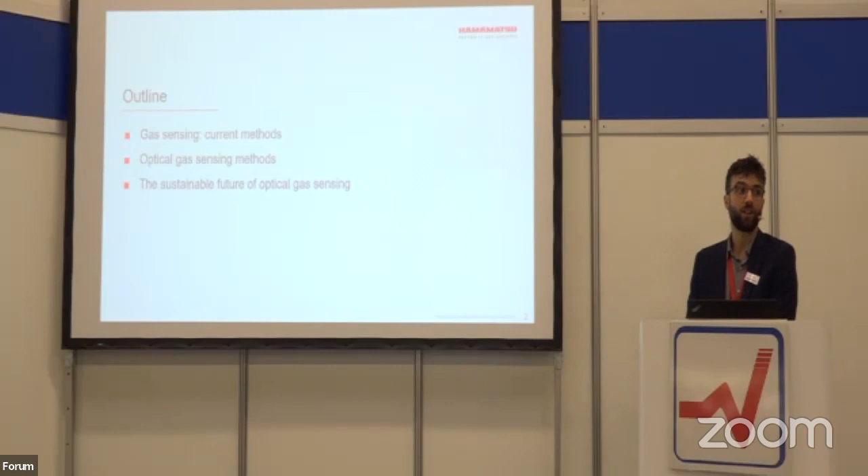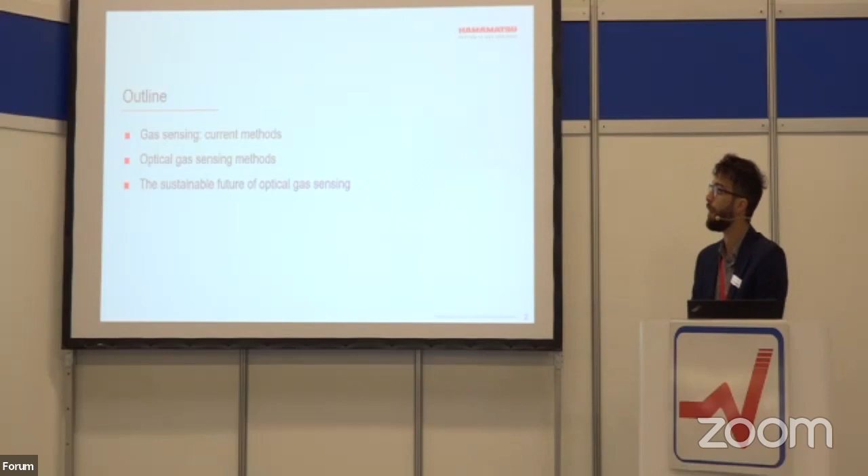First, I want to give you an outline of my talk today. At the beginning, I'm going to cover general topics about gas sensing, comparing several technologies, optical and non-optical. Following that, I'm going to talk about optical gas sensing and mention a few methods that can be used to detect gases. Then, in the end, I'm going to introduce Hamamatsu's sustainable technology in terms of mid-infrared detectors for the future of optical gas sensing.

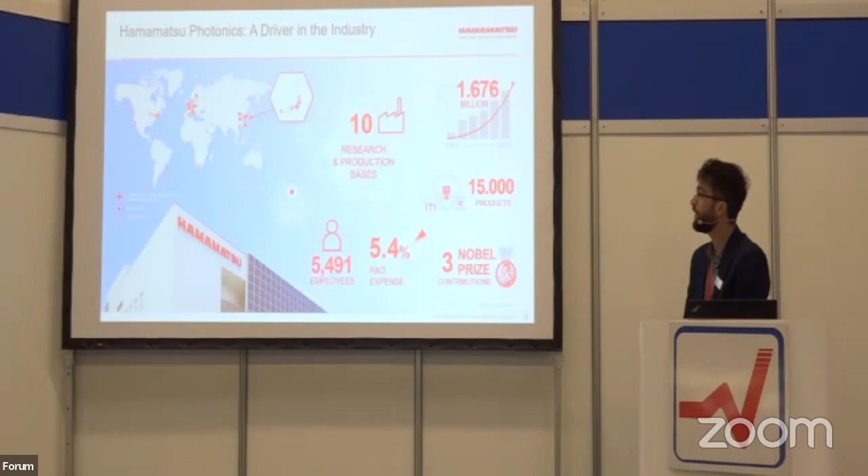A brief introduction about my company: Hamamatsu was founded in 1953 in Japan. We have several subsidiaries in Europe, the closest one being in Herrsching, close to Munich. The company commercializes and manufactures over 15,000 different products, including photonic components like the detectors I'm talking about today, but also light emitters, LEDs, lasers, up to complete systems used for biological research or semiconductor manufacturing.

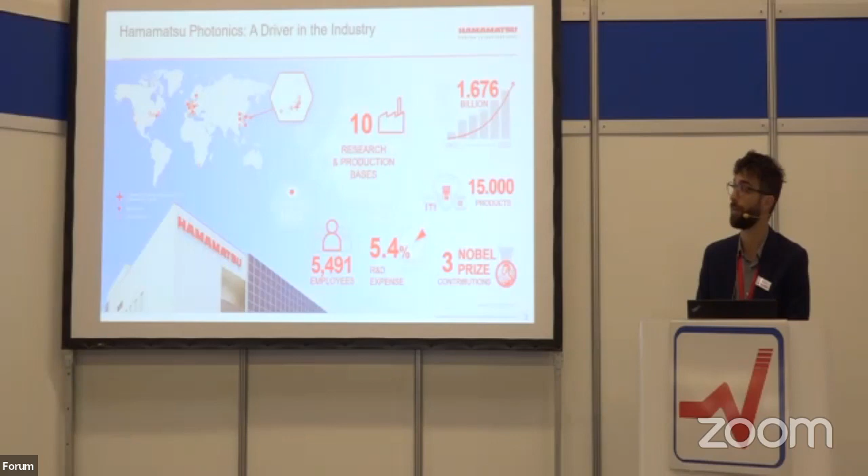Diving into today's topic, why do we need gas sensing? I identified three main reasons. The first is safety. Some gases may be explosive, like methane or hydrogen. Some can be toxic, like CO2 or hydrogen sulfide, and some, like oxygen, can be both toxic and explosive. We may want to measure them in certain environments like mines or oil rigs.

Another well-known reason to measure gas is environmental. For this, we need to measure important greenhouse gases like methane and CO2, but other gases as well, like NO2, SO2, or volatile organic compounds.

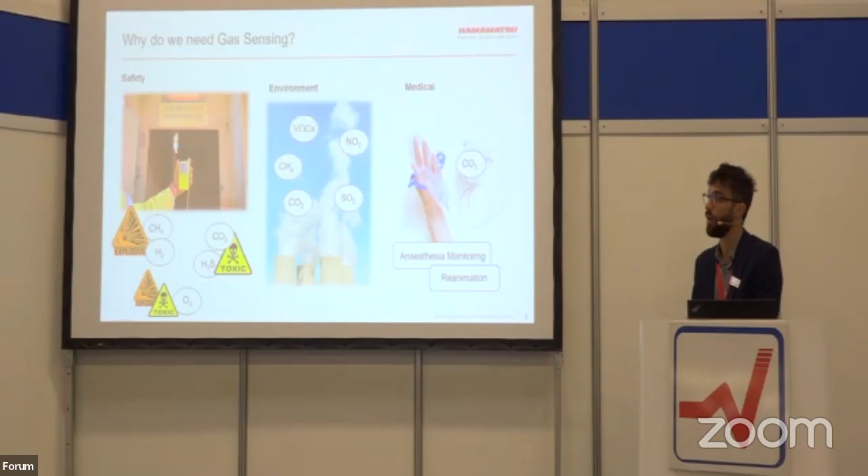This is an emerging field, the medical field, in which we measure CO2 through breath. This is done for monitoring of anesthesia or monitoring of reanimation.

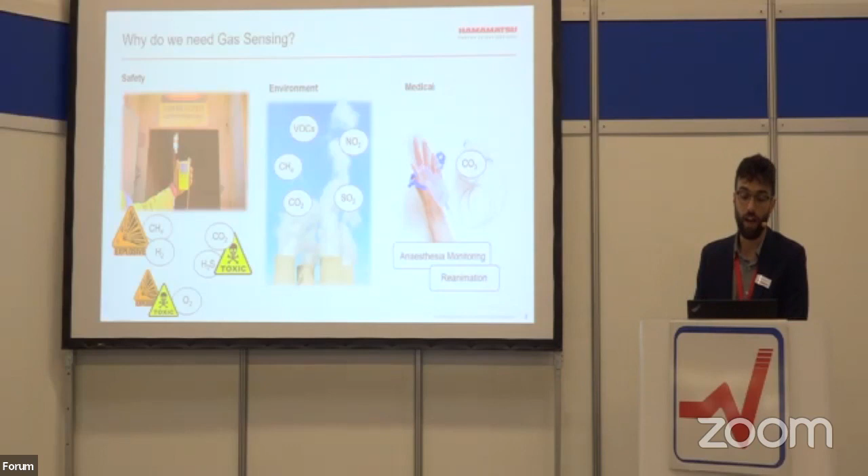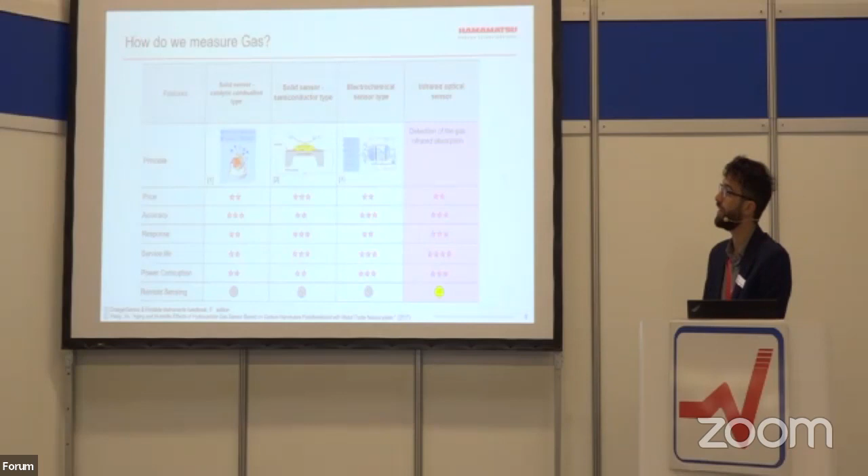I decided to put this table here to compare a few different technologies we can use to detect gases. Obviously, the choice of a specific technology really depends on the gas you want to detect, because not all technologies are suitable for all gases. But I thought this could be useful whenever you have the possibility to choose.

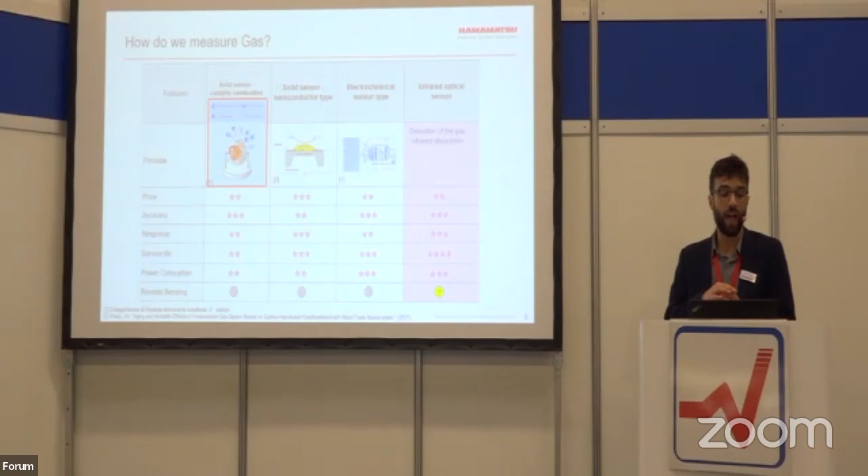The first technology, very well established, is catalytic combustion sensors, which have a resistor wrapped in a catalytic bed. This sensor detects combustion using a resistance measurement.

Similarly, we have a semiconductor type that works in a similar way. There is a heated membrane, and on top of it, we have a metal oxide deposition. What we measure here is the redox reaction that happens at the surface of the metal oxide.

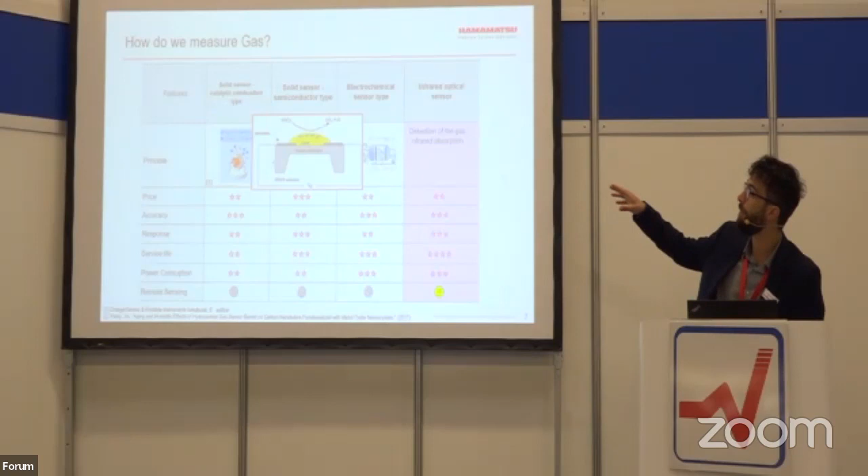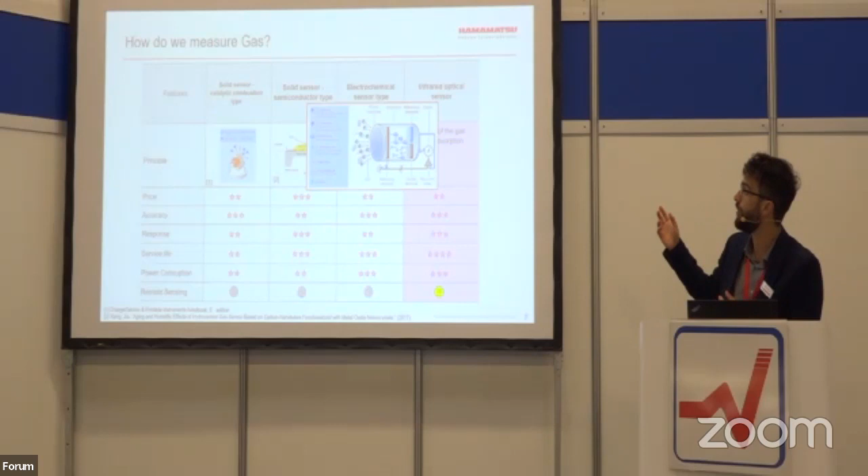A different category is electrochemical sensors. In this case, we have basically an electrochemical cell, so you have a cathode, an anode, and an electrolyte. With this method, you're able to measure polar molecules—the molecule has to be electrically charged, or needs to be ionized, in order to be detected.

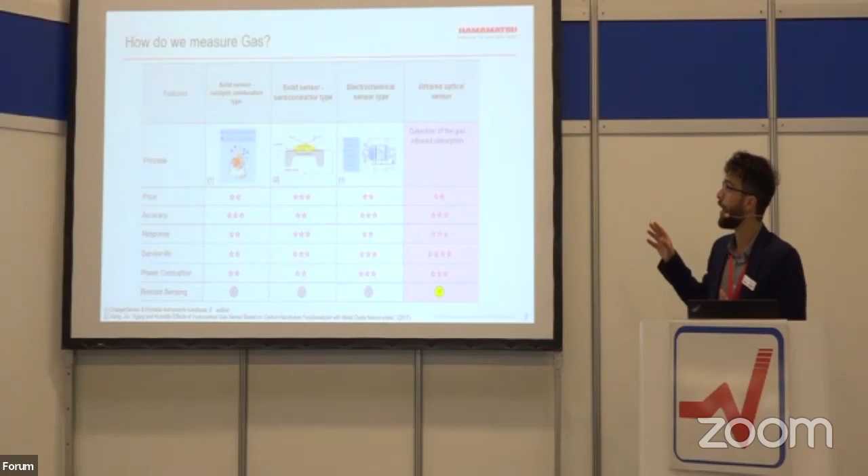My talk today is going to focus on optical detection, and I'm going to present a few methods later. But first, I want you to focus on the comparison here. Price-wise, optical sensing may be a little more expensive than the other technologies in the table, but it is more accurate and has a faster response.

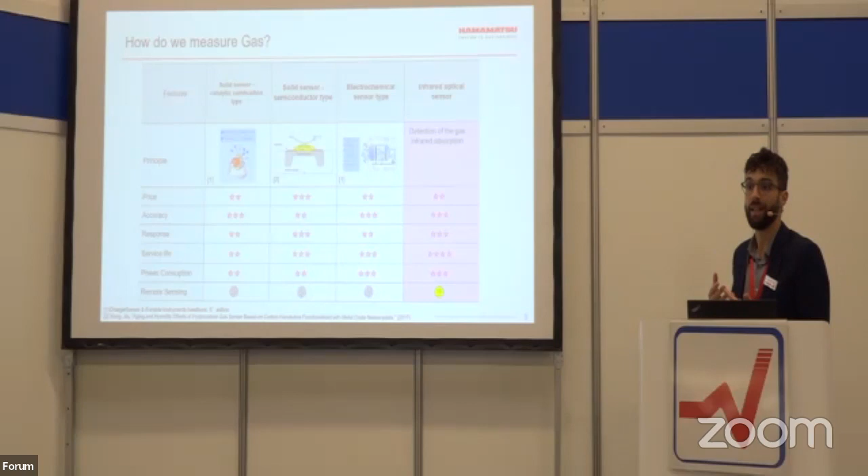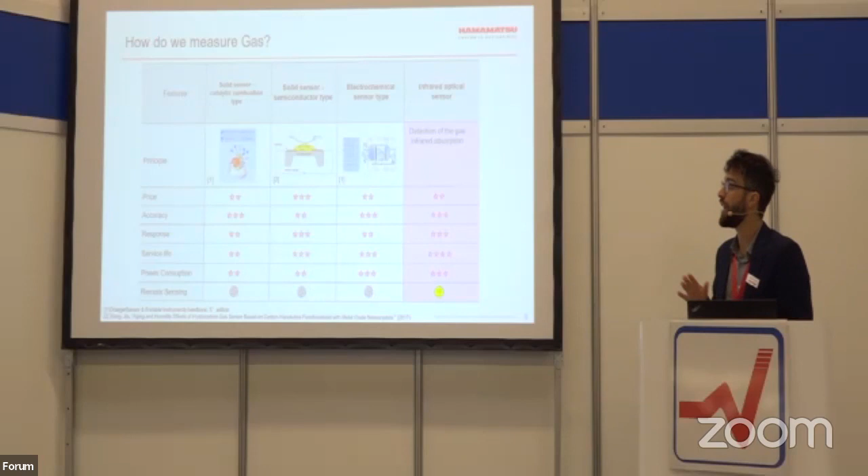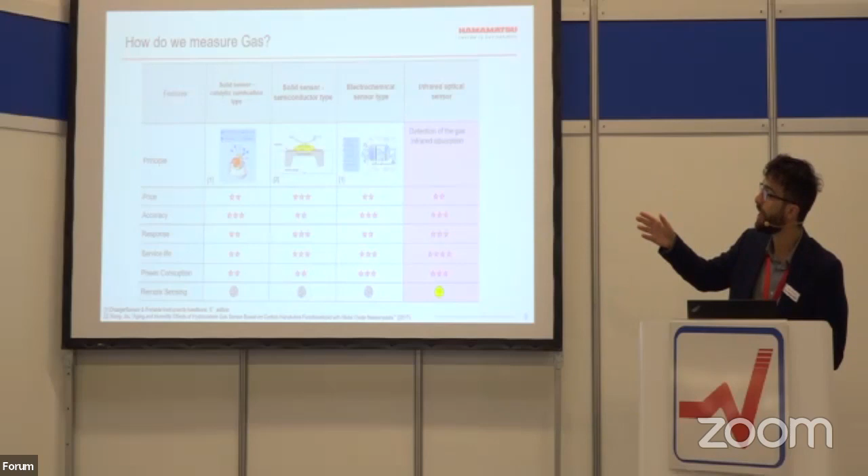Last but not least, we have remote sensing. All other, non-optical detectors need to be in direct contact with the gas to work, while infrared optical sensors do not come in contact with the gas.

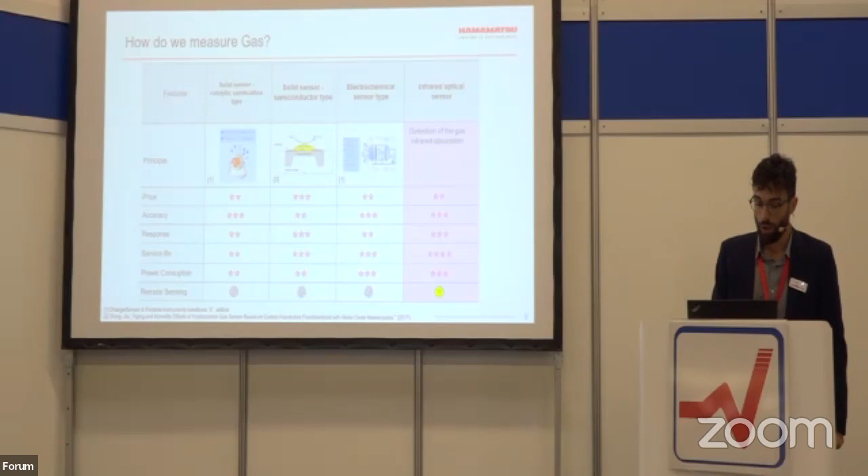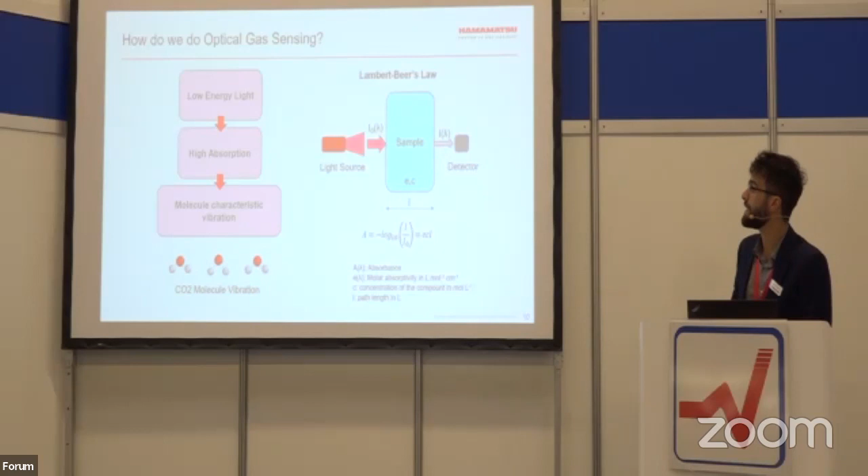The absorbance, which is also related to the sensitivity of our sensor, depends on three main factors: molar absorptivity, specific to the wavelength we're going to send; the concentration of the compound we want to measure, so we're also able to measure the concentration of the gas; and finally, important for what I'll say later, path length. The longer the path the light travels through the sample, the higher the absorbance, and the higher the sensitivity of our sensor.

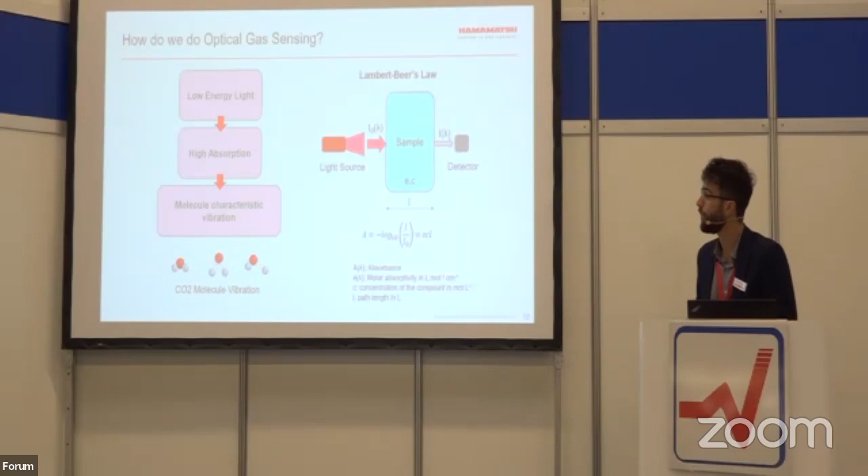Today I'm going to talk about mid-infrared wavelengths, but why do I focus on mid-infrared when the electromagnetic spectrum is so wide? There are three main reasons. One is we can achieve higher sensitivity in this wavelength range, mostly because the absorption peaks of many target gases are higher when we work with longer wavelengths.

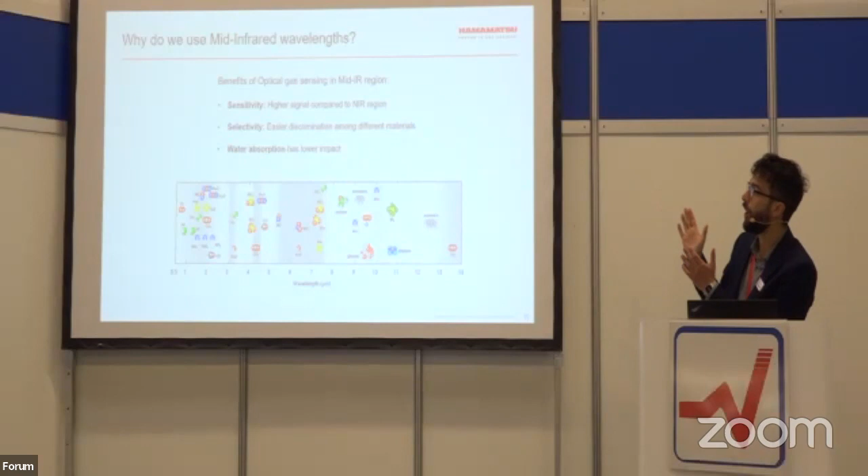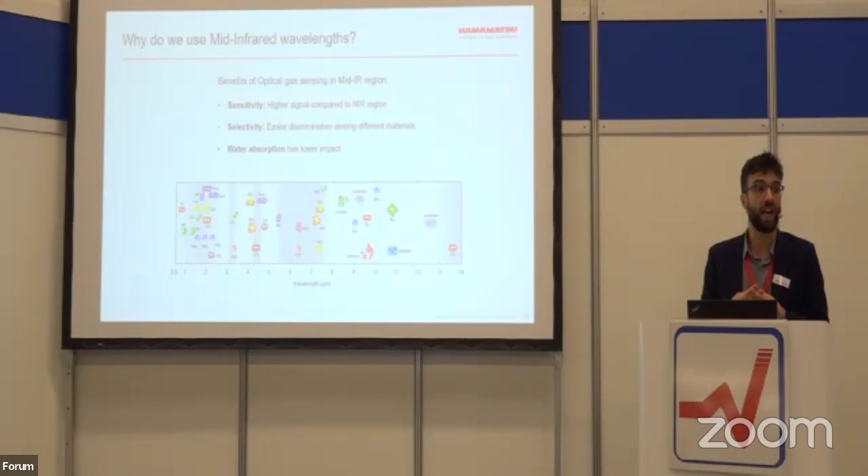Second, very important, selectivity. As you can see, going to the lower end of the electromagnetic spectrum, the gases are all crammed together, while when we move to longer wavelengths, the absorption peaks are more spaced apart. This means we have less cross-sensitivity towards gases when working in mid-infrared.

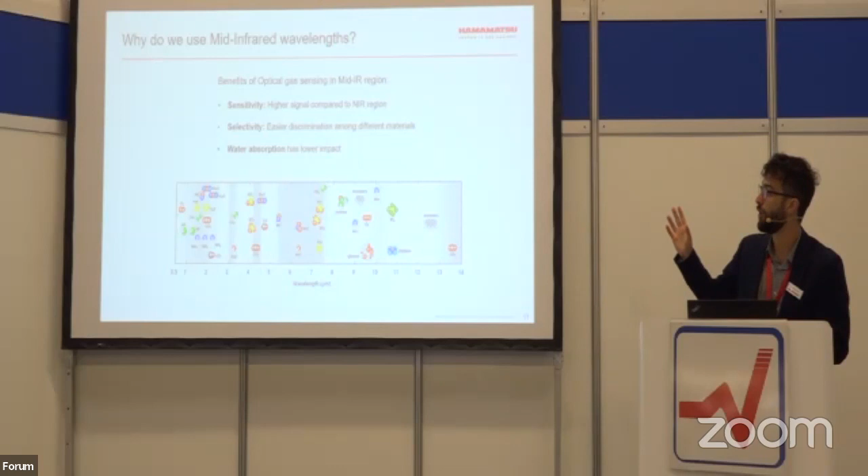And the third reason is lower impact from water absorption. We have several absorption peaks at shorter wavelengths, but moving to mid-infrared, water is absorbed less, and this makes our measurement independent from humidity in the air, for example.

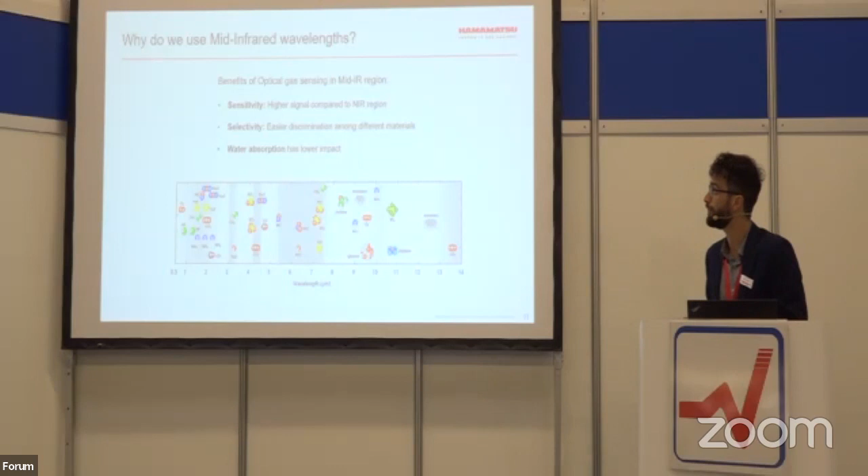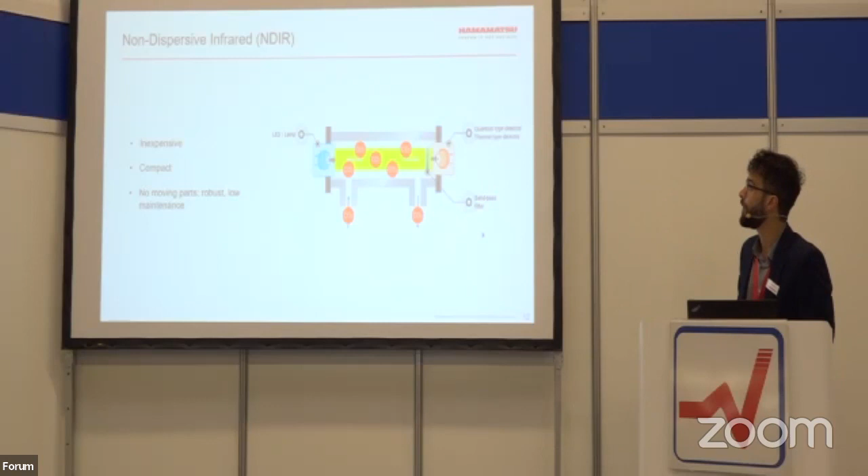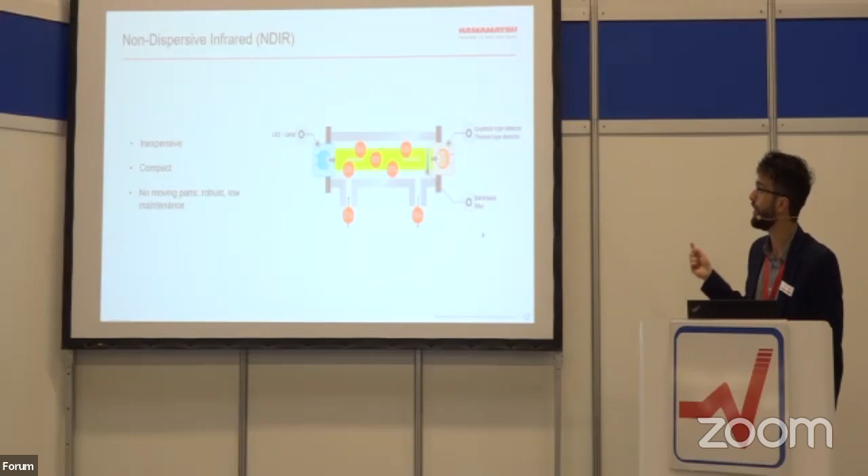The most simple and inexpensive gas detector is a non-dispersive infrared detector. It is quite simple, composed of an LED or a broadband light source on one side, then a gas chamber, and on the other side a detector, which can be quantum type or thermal type, I'll explain the difference later. In front of the detector you have a bandpass filter, and the passing band of the filter needs to match the absorbance wavelength of the gas we want to detect.

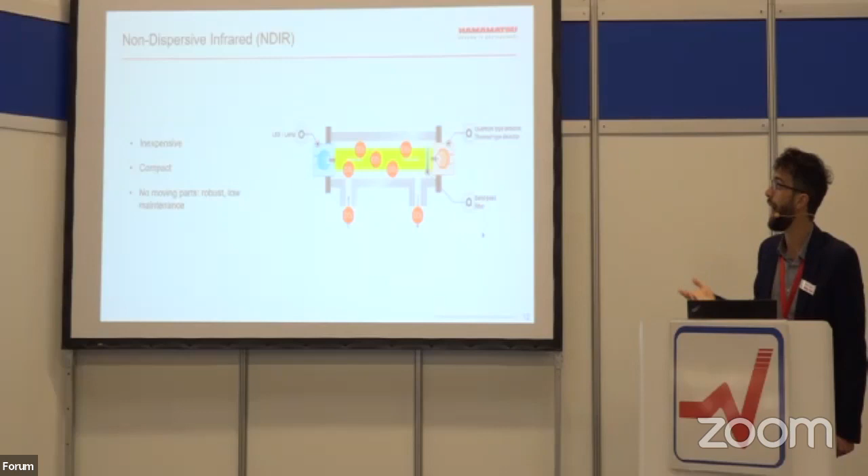So, for example, in this case we have CO2, which absorbs in the mid-infrared at 4.26 micrometers, so the bandpass filter is going to have a similar passing band.

With just a little modification, our system can become faster and achieve higher selectivity. The simple modification is using a laser instead of an LED or broadband lamp. In this case, we have a tunable diode laser spectroscopy system. The laser emits higher output power, making the system highly sensitive and much faster, and also more selective because the laser has a narrow emission bandwidth.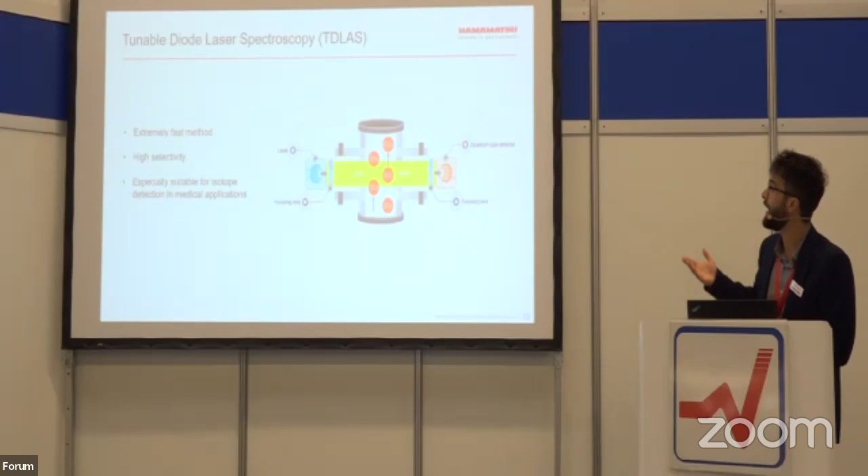We don't need, in this case, any bandpass filter, and the sensor can only be quantum type. This is related to the speed of the system, and we're going to see it a little bit later.

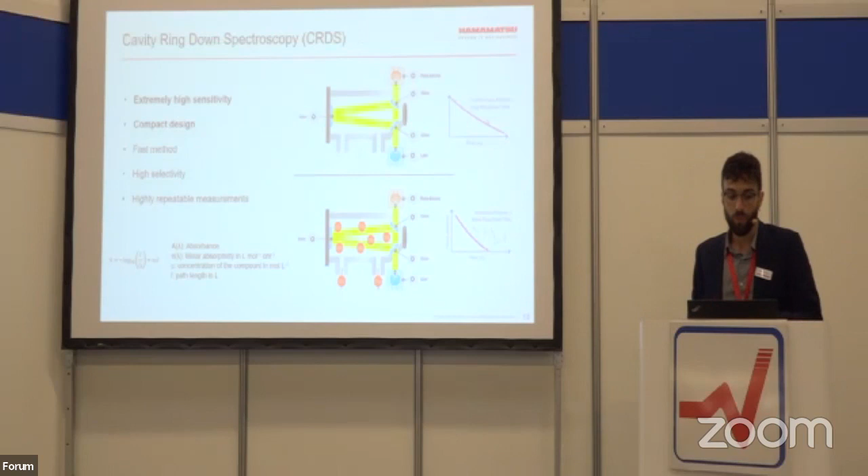Cavity ring down spectroscopy is the third method I'm going to present. It is quite similar to the previous one with a clever addition: mirrors that create a cavity inside the gas chamber. We have a laser that emits a short high power pulse. The light enters the chamber and starts bouncing off these mirrors while being read out little by little by the photodetector on top. This increases the path length the light travels, and in turn increases the absorbance and sensitivity of our detector.

It is a very sensitive method. We can have a long path length while keeping the design compact. It is fast and highly selective because we're using a laser again.

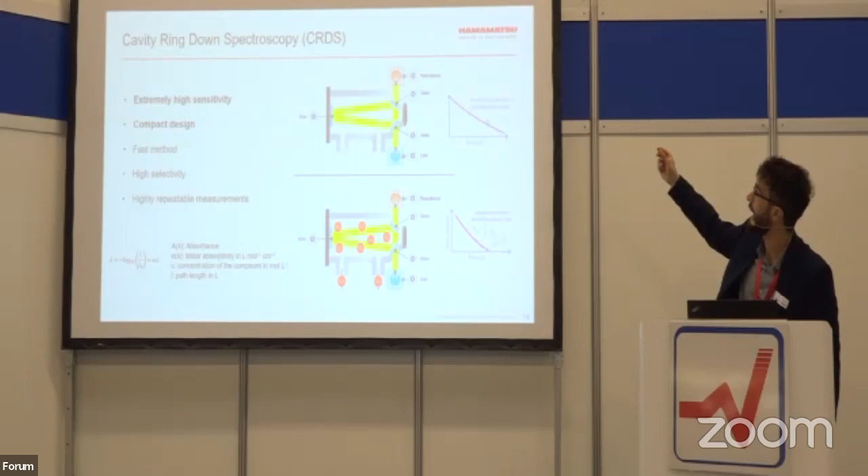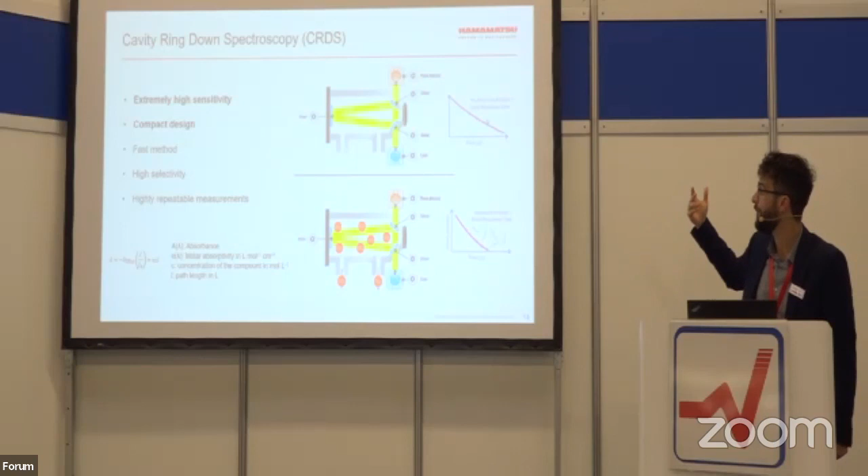What happens, as you can see, is that whenever the gas is not in the chamber, the energy measured by the photodetector decays little by little. But whenever we have gas in the chamber, the decrease is going to be steeper, so we're able to detect a concentration of CO2 in this case.

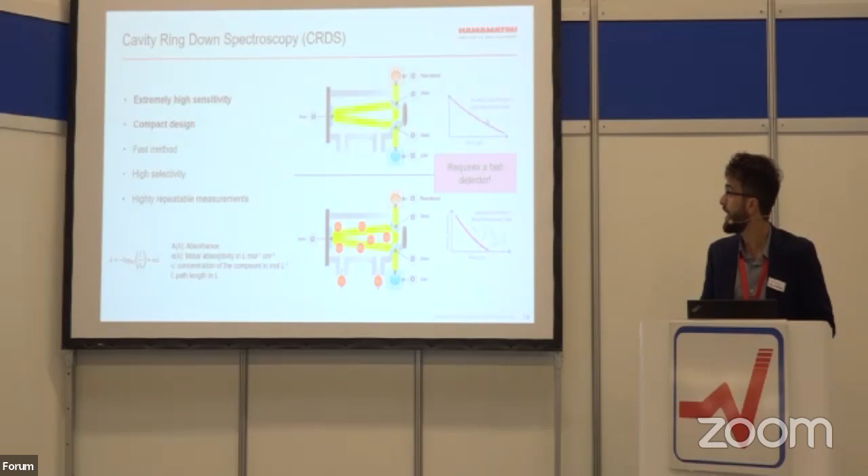The only thing we need for this is a fast detector, so we cannot use any kind of detector. This is why in this table, I want to present what are our options in terms of detectors when we do mid-infrared measurements.

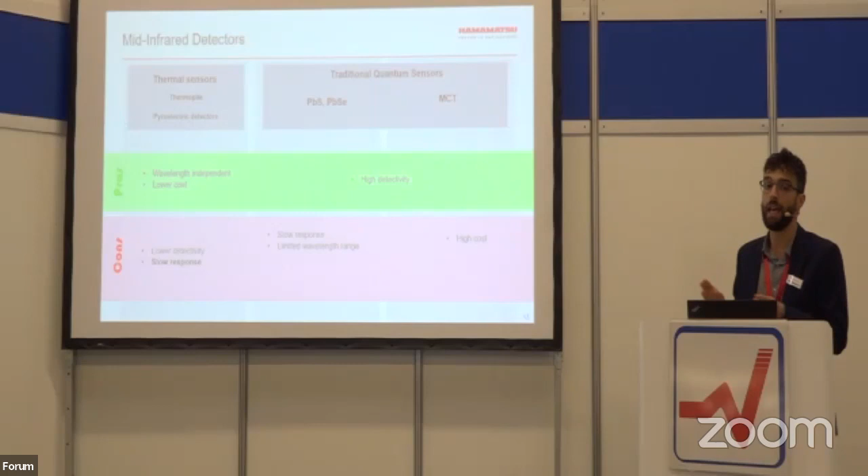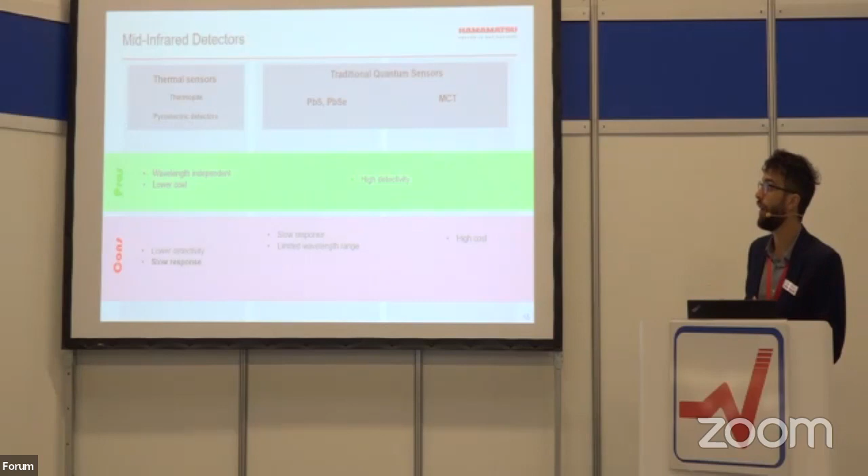On one side, we have thermal sensors, namely thermopiles or pyroelectric detectors. These are very good detectors because they are wavelength independent, so their detectivity is the same no matter what wavelength you're using as an emission. And they are fairly low cost for your system. The main drawback is that the detectivity in general is lower compared to traditional quantum sensors, and most of all, their response is fairly slow. We're talking about milliseconds against nanoseconds that can be achieved by quantum sensors.

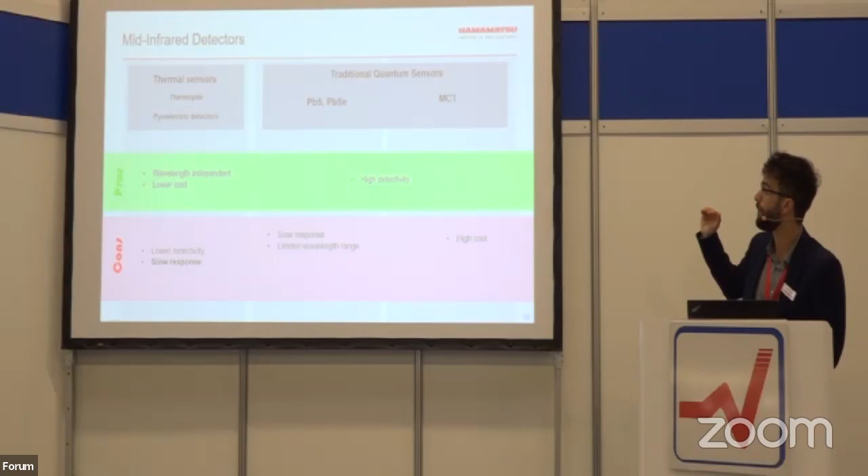When we move our attention to quantum sensors, we see that we have lead sulfide, lead selenide, and mercury cadmium telluride detectors. These achieve a higher detectivity with respect to the thermal sensor, but while the first two have a limited wavelength range, which stops at about 5 micrometers, and a slightly slower response, the MCTs have a very long wavelength range. They have a very high sensitivity. They need to be cooled down very often, and this makes their cost go a little bit higher.

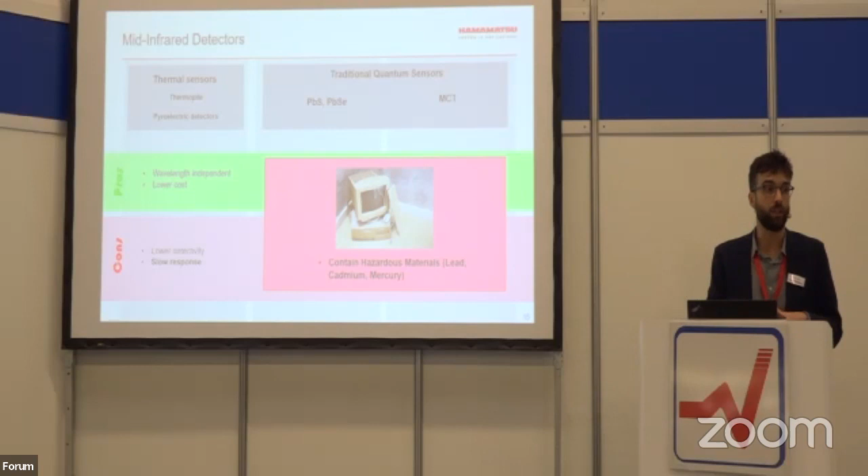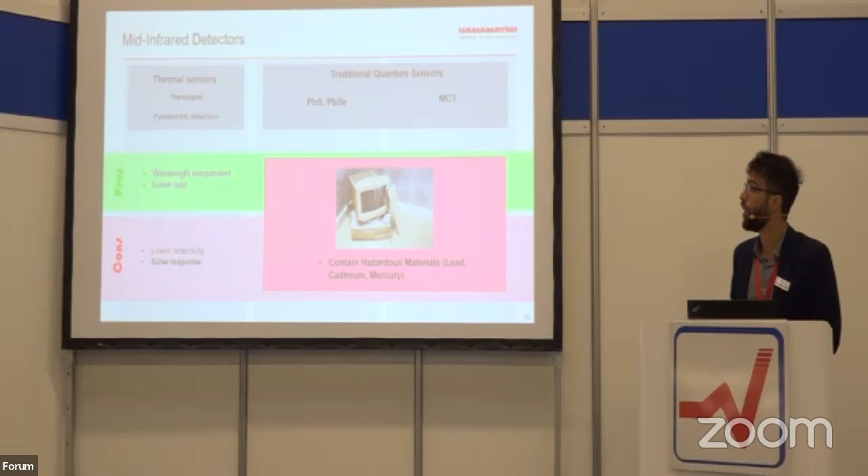But there is an issue that these traditional quantum sensors share, and the issue is the presence of heavy metals inside of the material. We're talking about lead, mercury, cadmium, that at some point in the life cycle of the sensor is going to end up in a landfill and cause environmental pollution. There is a European directive that restricts the use of this material in sensors as well, but these specific ones can be manufactured and commercialized due to some exemptions, temporary exemption to this ROHS compliance directive.

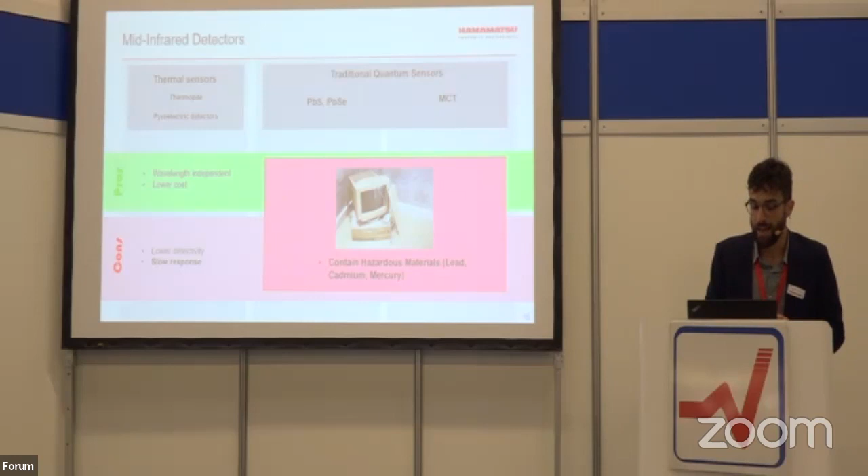This means that they can be used temporarily up to 2027 or 2028, according to the specific application they're going to be used in. And this is the main reason why at Hamamatsu, we started thinking about alternative materials for detecting mid-infrared wavelengths, and our engineers are pioneers in the development of sensors using indium arsenide antimonide material.

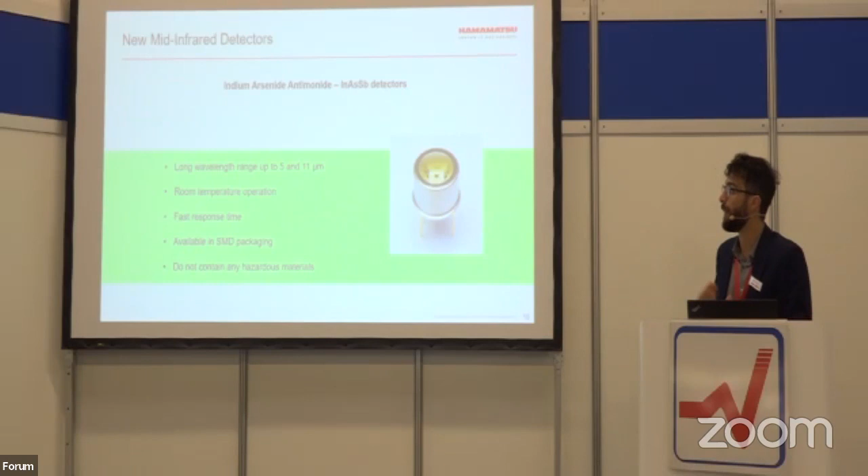This material is totally comparable to MCTs in terms of wavelength range. We have products that are highly sensitive up to 5 and 11 micrometers. They work at room temperature. They can be cooled down, but they also work at room temperature. They have a fairly fast response time that makes them suitable for cavity ring down spectroscopy. They're available in several different packaging, like SMD packaging, for example, or the TO can that you can see here. And most importantly, they do not contain any of those heavy metals.

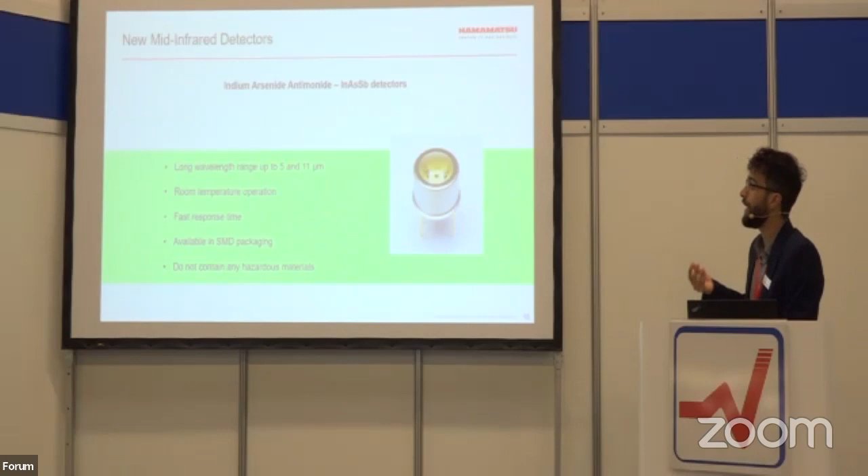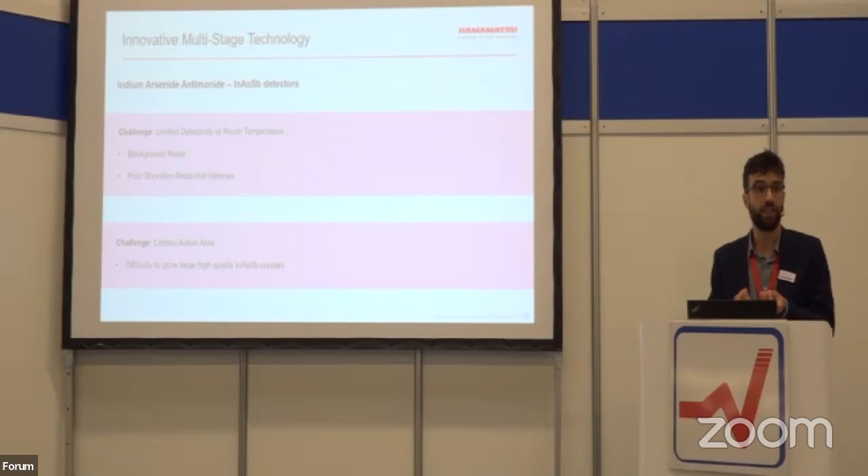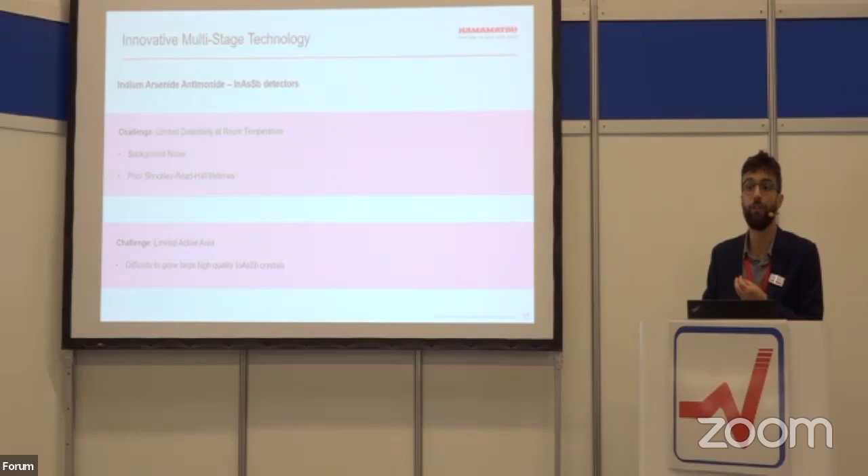Of course, every technology has its drawbacks, right? So I'm going to present a few challenges that our engineers had to face whenever developing these sensors. One of them, maybe the most important, is limited detectivity at room temperature. This was caused by high background noise and poor Shockley Read Hall lifetimes. What that means is that whenever a photon hits the crystal, there is an electron that is created, and this electron needs to be read out by the circuitry before it is recombined. It was very difficult because the electron was recombining before being read by the circuitry.

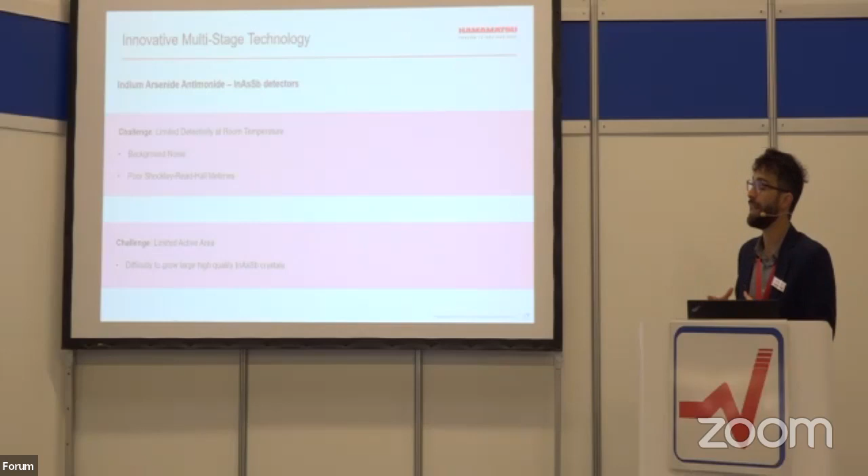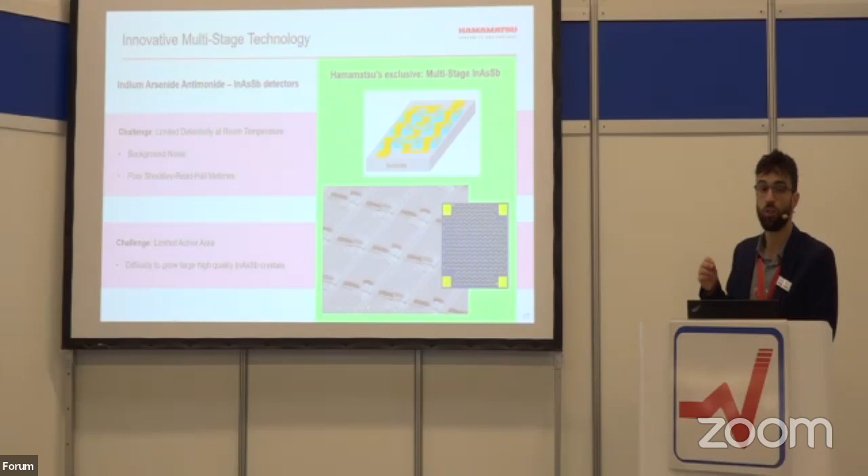Another challenge is we could not achieve large crystals with high quality, so this limited the active area of our detectors. Our engineers came up with a very clever solution. Since we could not grow large crystals, we started growing several small crystals and connected them in series. In this way, we could have a large active area without the need of any focusing optics. And we solved the problem of limited detectivity, because now the electron didn't have to travel very far before being read.

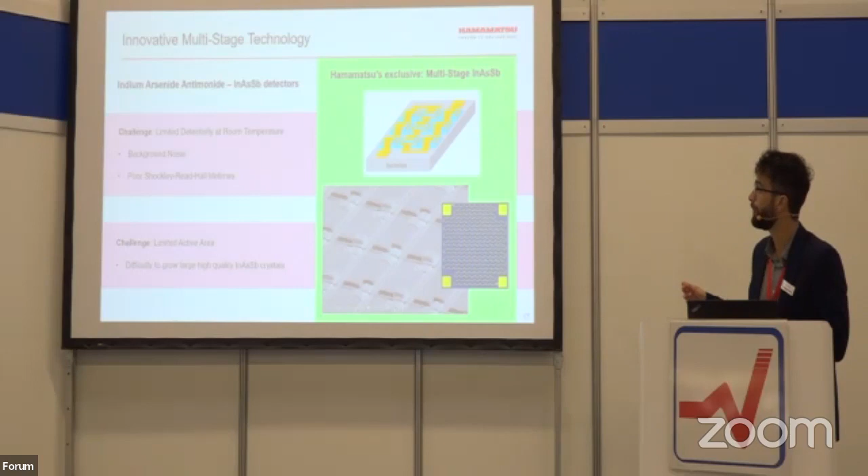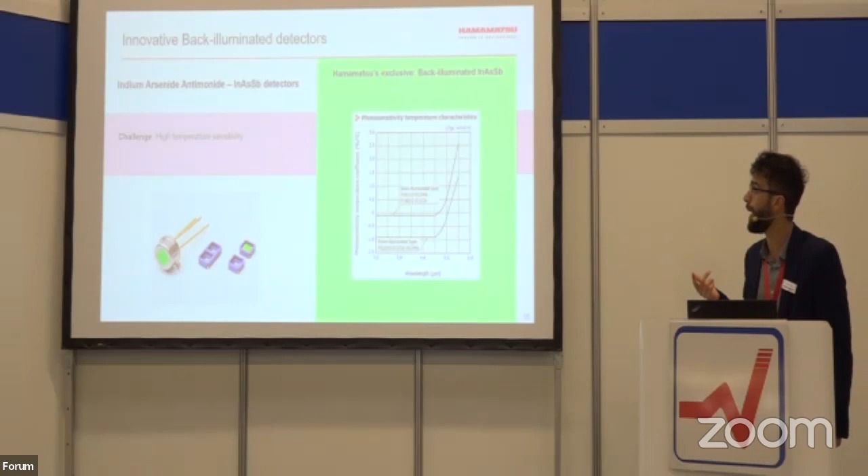Another challenge was high temperature sensitivity. This means that basically, whenever environmental temperature was changing, our photosensitivity was also changing by about 1% per centigrade degree. With our new back-illuminated fabrication method, this improved a lot, and now we're able to have a photosensitivity of about 0.1% per degree Celsius.

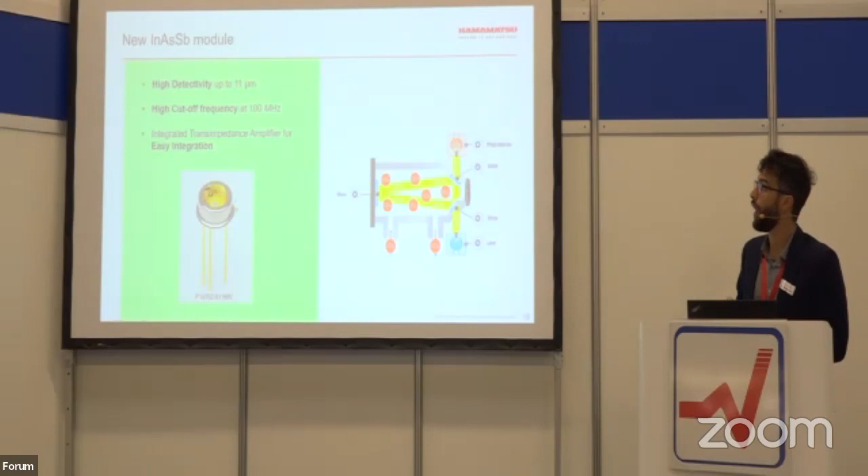All this talk then comes to the presentation of the latest detector that we released, which is this P16702. This is a detector with high detectivity up to 11 microns and with a high cutoff frequency at 100 megahertz, and that integrates a transimpedance amplifier for easy integration. This specific detector is thermoelectrically cooled, so our circuitry is also capable of keeping the temperature of the detector.